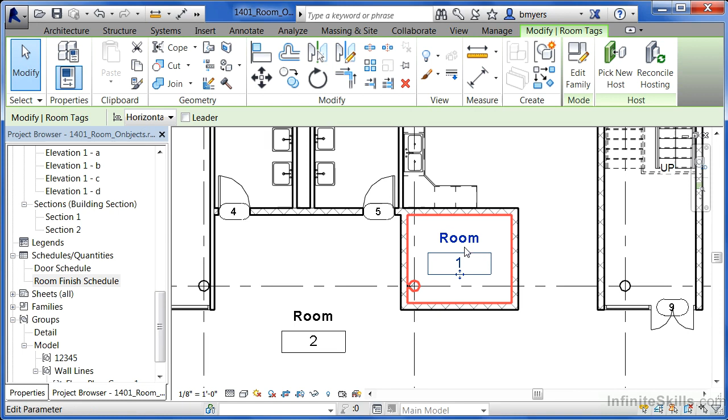Now zoom in here to where we have room 1. Ultimately, this is just going to be an elevator pit or an elevator shaft. Realistically, we may or may not have to label this, but I do want to call it something. So I'm going to click on the tag, then click on the word room, and call it ELEV, so it stands for elevator. Here we have our room 2.

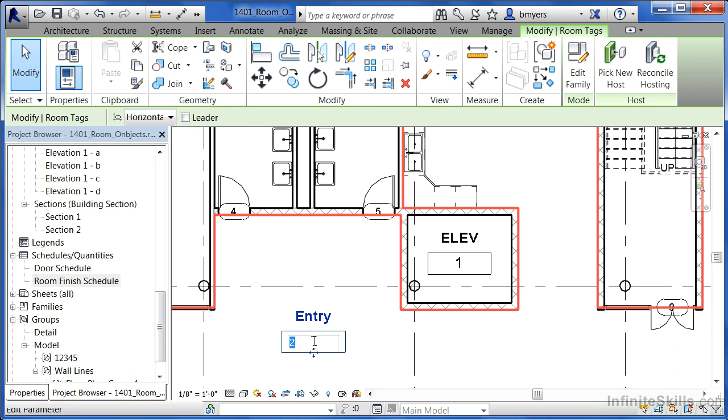Click on that tag, and now let's change this to be entry. I'm going to leave it as being the number 2, but if I had wanted to change that number, it would just be a matter of clicking on the tag, clicking on the number, and then typing in the information we'd want it to say.

There's another way that we can go about doing this, and it's actually my favorite way to do it. You can either click out here in space or hit escape to make sure that you're out of the command. My favorite way is to come over here underneath schedules and quantities, and then double click where we have a room finish schedule set up.

There'll be an option midway through here that says insert above the word rows. Insert a data row. Do this 3 or 4 times.

We can see we have ELEV, and that's the name of our first room. There's an entry level room here, and we can already see the square footage of each of those spaces. So the second that we were dropping these into the spaces, it was filling in the information on the room finish schedule. Now, the next thing I'd like to do, name this one here and just call it office.

The fourth one, I'm going to call break, for break room. This one is going to be men's. This one women's—these are the restrooms. And this is going to be stair.

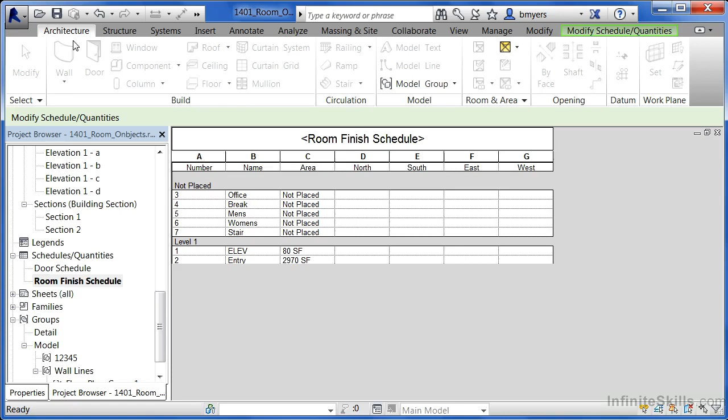For right now, I'm going to leave these numbers just the way that they are. And I'm just going to click in one of the cells so that finishes off the stair command there. Now that each of these have been put in, come back to the Architecture tab, then come up here to the top on the project browser and double click where it says Level 1.

Underneath the Architecture tab, we now are going to place another room. Before we click, I want to point out something new. There's an option here that says Room and New. Click that. Here we have a list of all those rooms that we just set up.

As a result of this, we can click on 3 Office and place it in the area where the office is at. We can click here, click where the break room is. Wait a second—if we try to place the break room in here, this is going to give us a problem because I only want the break room to come into this area right here.

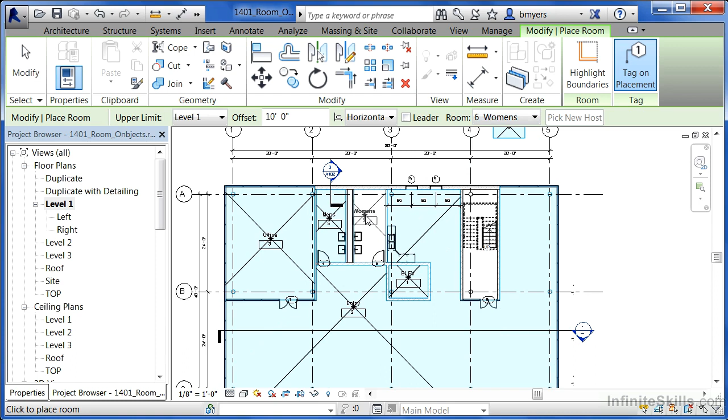Let's hit escape for right now, and we'll come back and try to address this situation in just a minute. Select on 5 men's, and then just put it in one of these restroom areas. I'm going to click the X to that. The women's room, I'm going to place it there. I'm going to hit escape a couple of times now to get out of that command.

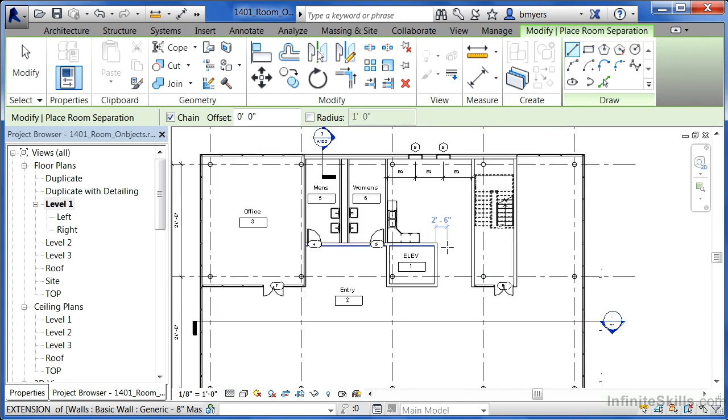Now, we still have this room right here. Well, it's not actually a room because we haven't placed it yet, but we want it to be a room. To accomplish this, once again, underneath room and area, there's an option up here that says Room Separator. If we select on Room Separator, pick this intersection, and then draw a line all the way across and click.

Now, if you move your mouse around this area, one of the things you'll see is if you cross over any place there's an X, that indicates that's where the room is at. If I click on it to highlight it, we can see that that line we drew, a room separator line, has now stopped this entry-level room from going into this space.

And as a result of that, we can once again come up here to the Architecture tab, pick on the Room command, and then pick Break off of the list, and then place it right inside the break room area. And finally, pick Stair off of the list, and click to make this be our stairwell area.

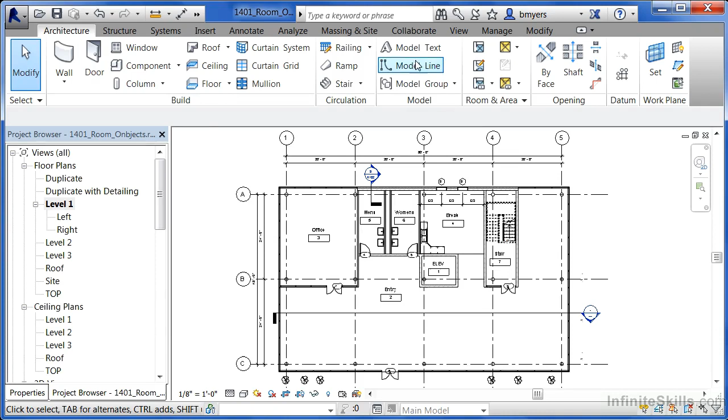So by going through this method, we were able to predefine all the different rooms and then place them in the correct locations. So there's two different ways to drop rooms in. The first way is just to come underneath architecture, select up here, and then tell it, I want a room here, here, here, here, and here, just by clicking. The other way is to go into your room finish schedule, set up all those rooms in advance. Then you can just pick them off of the list and place them in order wherever you'd like to be able to place them.